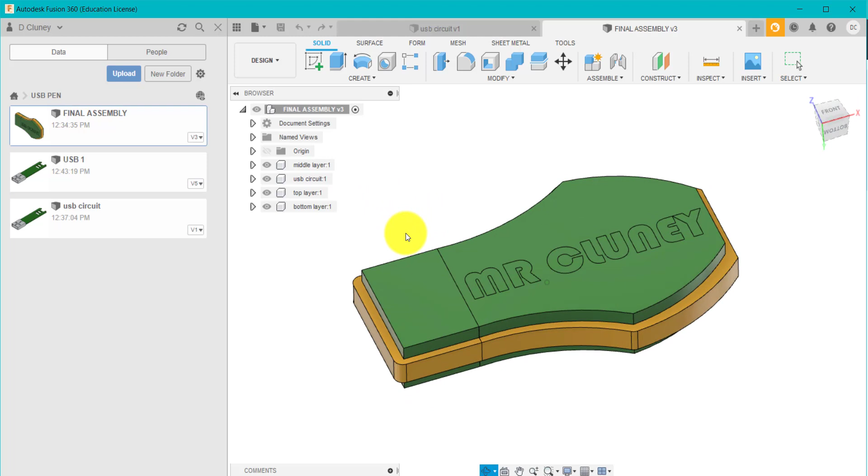So if we jump into Fusion, if I go back up to here and just show you one design that I come up with, you'll see what I've done. This design could easily be 3D printed in layers or even laser cut, say out of acrylic, and then I could put the circuit inside.

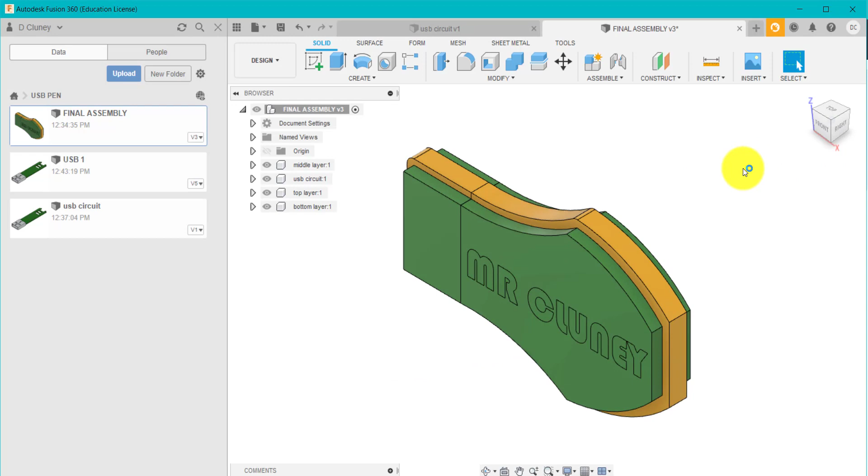So if I hide some of these, you see that the circuit's in there. I can put the circuit inside and glue these layers up, and I've got a very simple design. There's nothing wrong with that design, okay? It will work, it will function, but I'm just going to show you a different technique on this one.

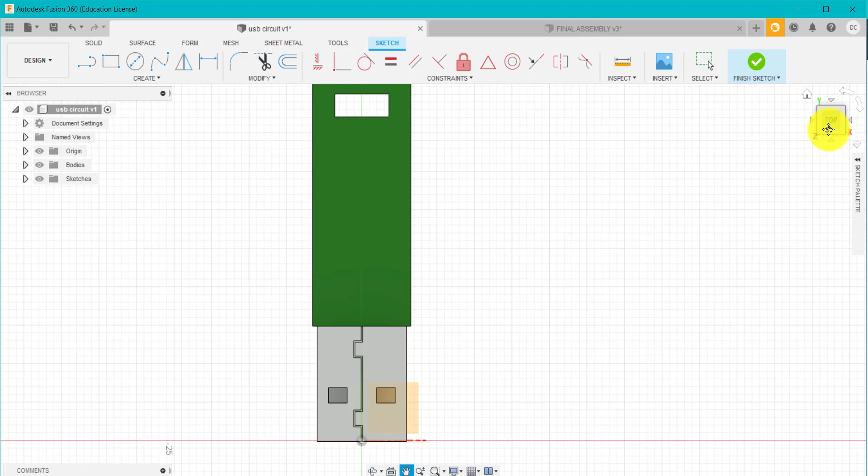Okay, so first of all, we're going to click on Sketch. I'm just going to hide that so we've got a bit more space. And I'm going to zoom in and I'm going to click on this bottom layer here, and I'm going to zoom out, use the pan tool just to pan it around. And I'm just going to turn it this way because it's easier to show you what's happening.

Right, the first thing is to create a design, a body around this. And then, once we've got that in 3D, I'm going to subtract this component away from the body, and it'll basically create a cavity for this USB to sit in. And then there's another few things that we might do in terms of splitting it to create a cap, or splitting the main body in half, so it's easy to assemble later, but I'll show you that shortly.

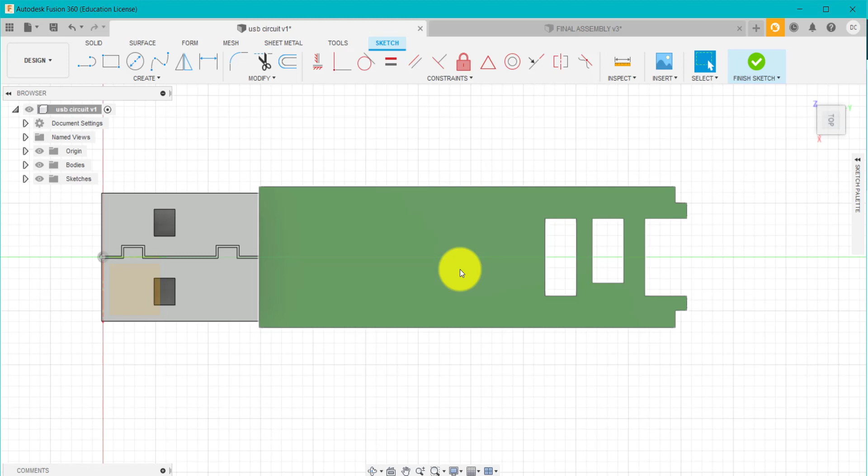So we can use any of these tools up here or a combination of those. I could use circles, I could do lines to create a design, ellipses, I could use a spline if I want a very curvy design. It is entirely up to you. But what I'm going to do is create quite a simple design to start with.

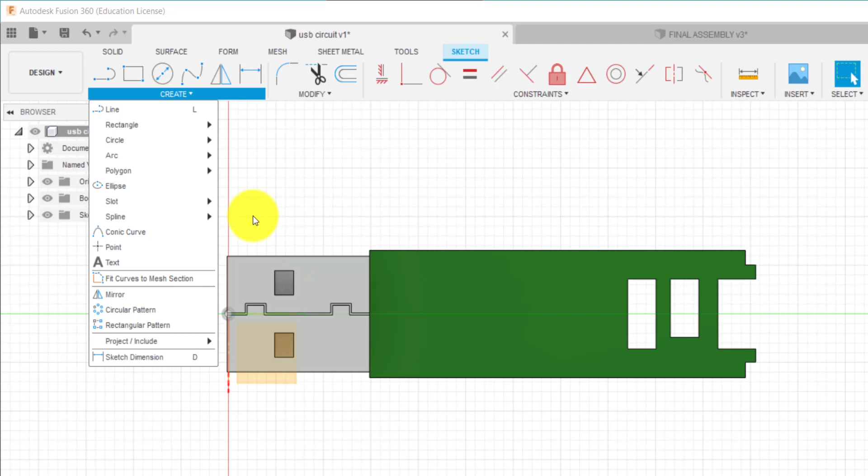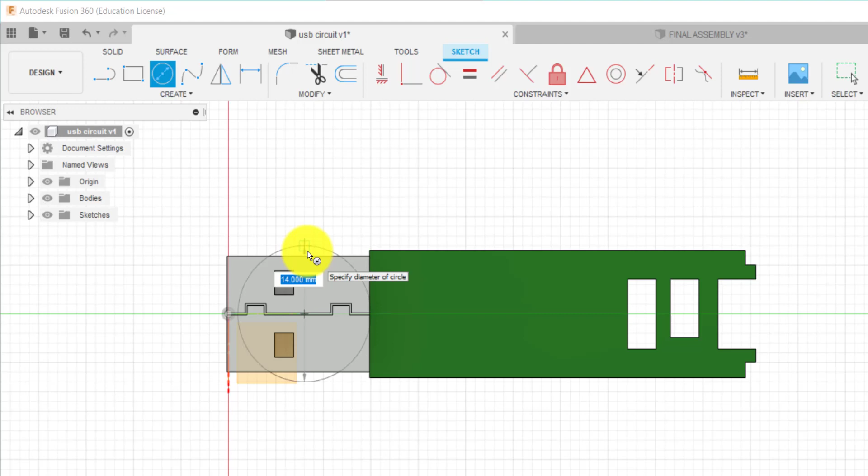I'm going to use a set of circles. I'm going to hover on this center line and drag this out. And I need to make my body obviously bigger than the actual circuit board. So if I'm drawing this here and that's like part of the cap, it's clearly not going to fit, it's going to be sticking out. So this needs to be a little bit bigger. So I'm going to go for, say, stick with 26, that's quite good.

And click enter. So if you remember before, you could always click dimension, dimension these, and edit any of these by clicking on it. So if I want to do 25, I could do that. And again, I could use some straight lines, curves, or whatever to create a design in here.

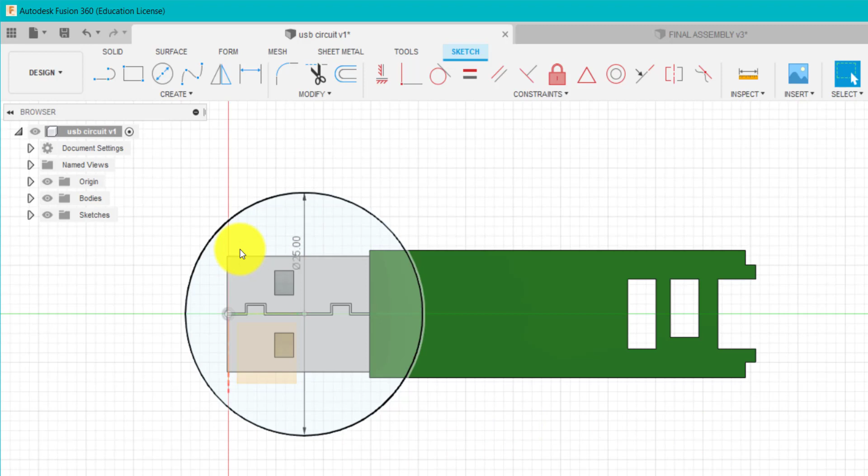Now what I'm going to do is something that you may have practiced before, is create a rectangular pattern. So I could draw a circle and another circle and dimension them, but just to make life a bit quicker and easier, I'm going to use this to stretch it out. I'm not going to stop there because I want my circuit board to be within my design.

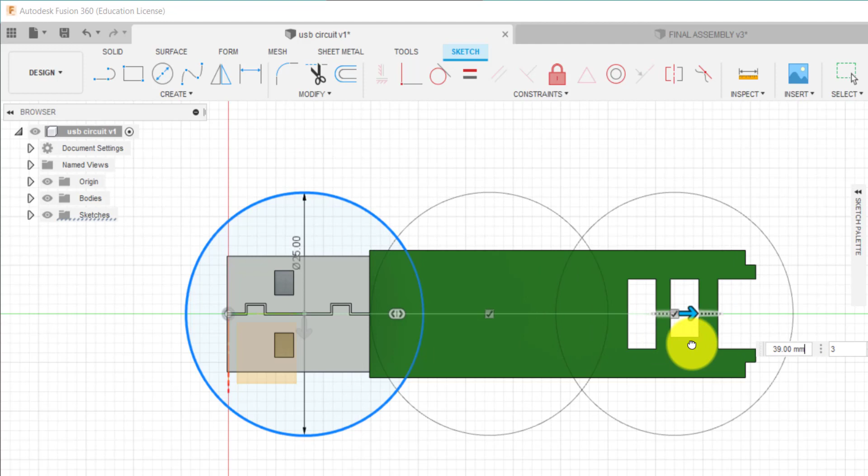So I'm going to go a little bit further, like so. And I want all these circles to be the same size. You might want smaller circles, it all depends on your design, but I want them the same. So I'm going to copy those across like that. I'm going to come to the home so I can see what's happening in 3D.

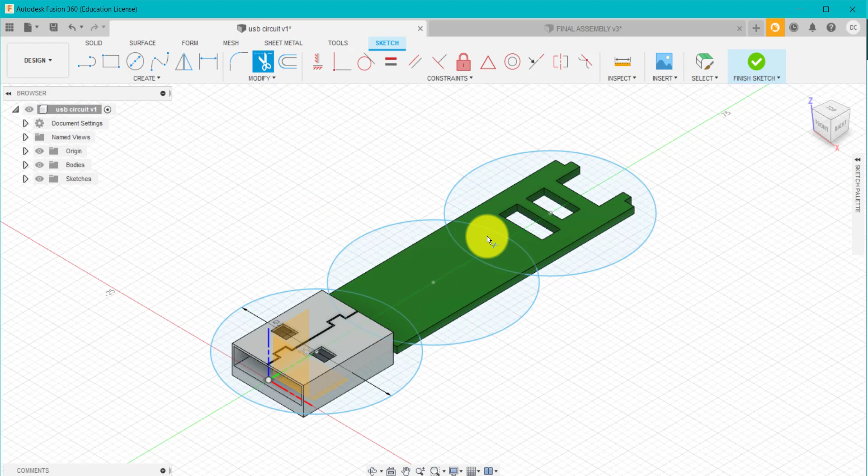And I'm going to extrude this. Now, depending on your shape, what you might want to do is tidy up your sketch by using the trim, and you could delete some of these intersecting lines. But I'm going to save a bit of time by just going to extrude.

And I'm going to just select all these like so, also left clicking to select those. I'm going to come to the front view so I can see what's happening. And Fusion wants to cut, so it's going in red, it's got cut. I don't want it to cut. I don't want to join, because if it joins, it's going to fuse into the circuit board of the PCB.

I don't want it to do that. I don't want it to cut, don't want to do an intersect. I could do a new body - that's one way of doing it.

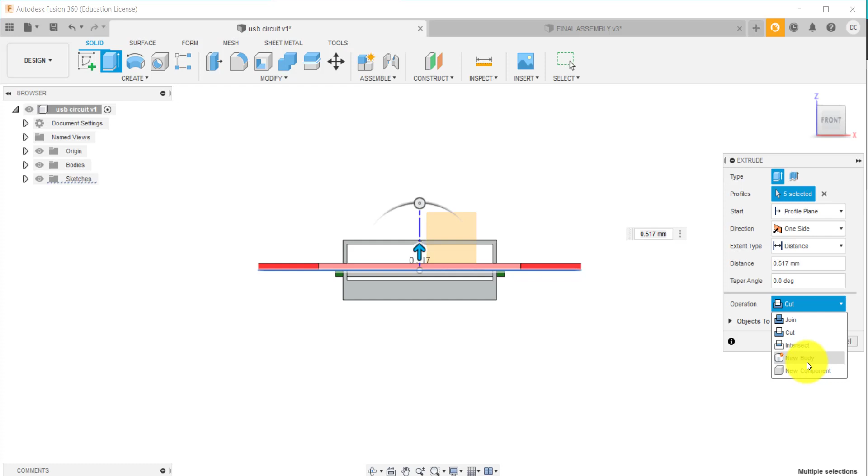But I'm going to create a new component, and a new component will make certain things easier later. I'm going to drag this up, and as you can see it's only going one direction, so I could do two-sided. If I want the top to be slightly thicker and thinner than the bottom, I could do that, like so. Or I could do symmetry.

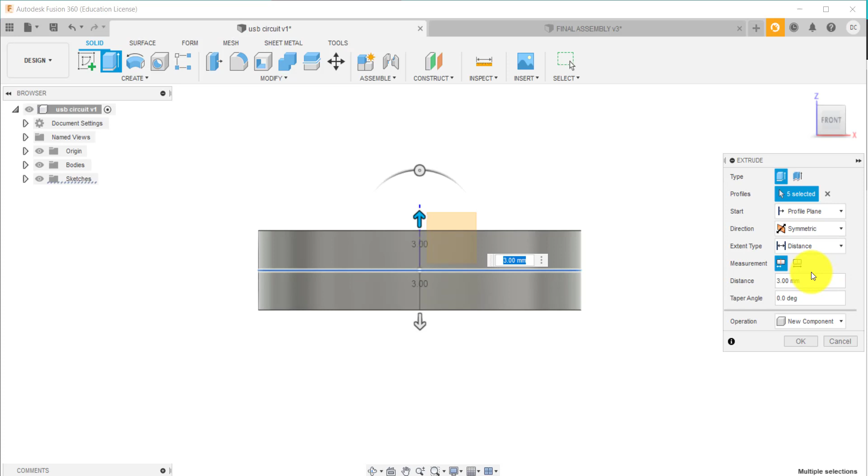Now that's doing half the length, so it's doing 3 millimeters either side. I could do the total length, which is 6mm at the moment. We're going to stretch that up to say 7mm, and you can see what that's done. Remember, new component will be easier for later.

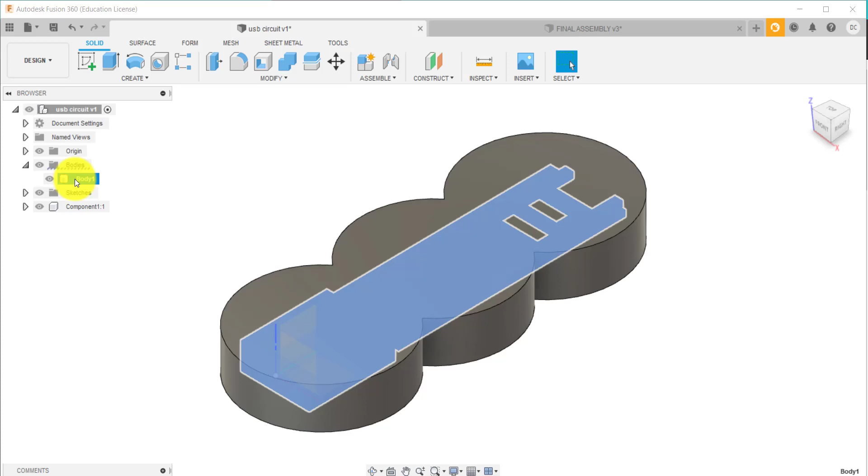So what I've got at the moment, if we go up to here, I've got this body and I've got this component here. Now I could later create a component of that if I want to do an exploded view and stuff like that, which I'll show you later, but for now I'm just going to keep it as a body. What I want to do is essentially subtract that body away from this component.

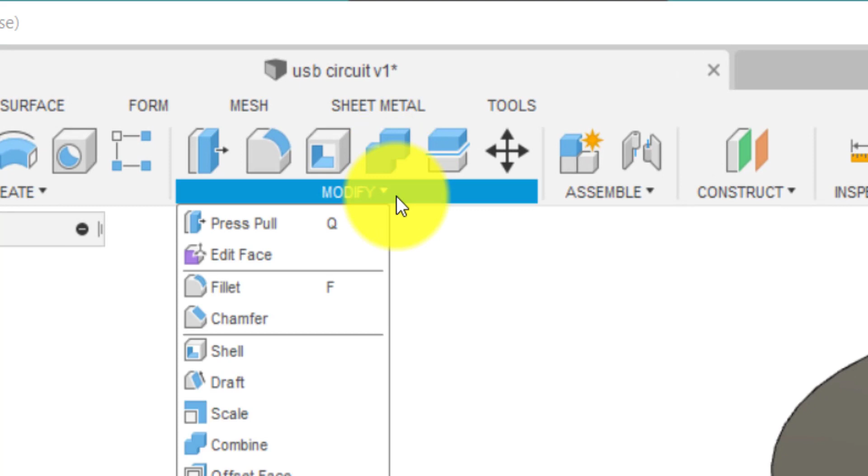And it's very easy to do. All we do is go to combine, or this is in modify, like so, and target body. Target body is this body here, what I've created. The tool is going to be this one here, and I want it to cut.

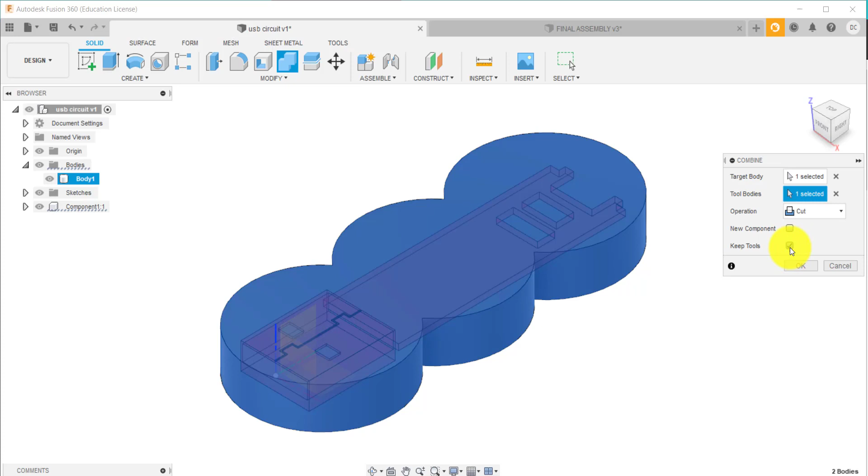There are again some different options - I don't want to join it or do an intersect. What I want to do is a cut, so it's going to subtract it, and I need to tick keep tools. If I don't click that, then my USB might disappear. So I want to keep it, and I'm going to click OK.

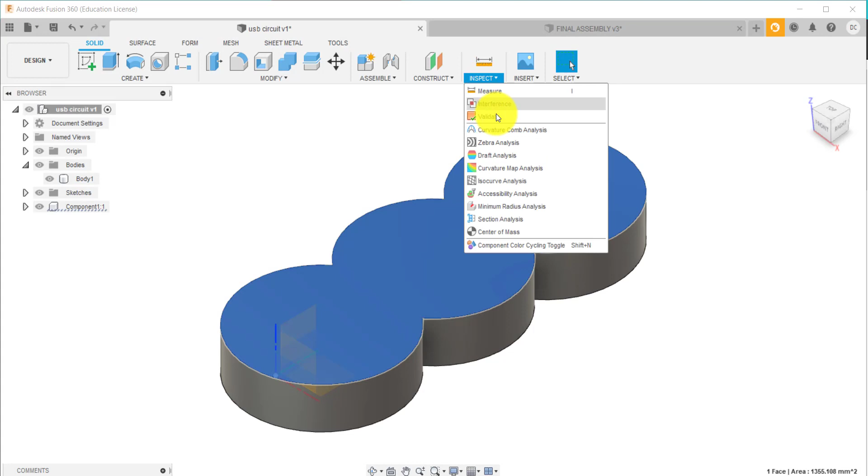Then you might be thinking, sir, that hasn't done anything. Okay, it has, because it's on the inside. So the way to look at that is a number of ways. What I'm going to do is select that top surface, go section, and I'm going to drag this down. And you can see what it's done - it's subtracted my circuit board away from my body. It might be easier if I do a cross section.

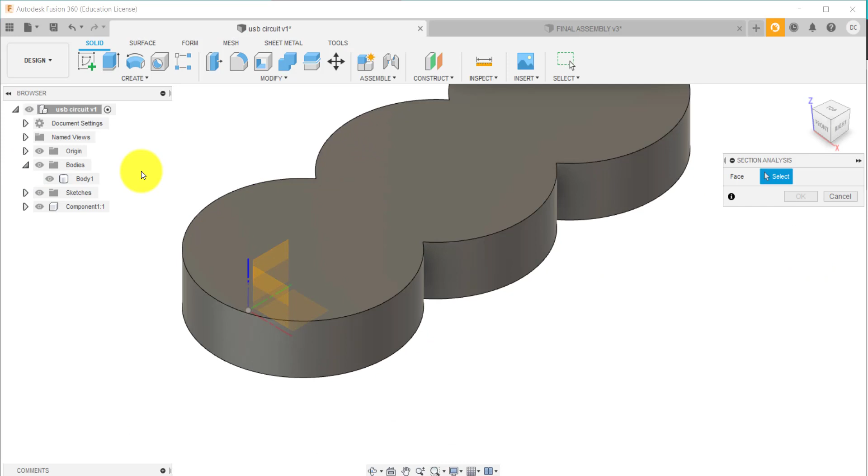Let me select one of these origins. I'm going to select that one. And what it's done, like I say, it has subtracted away from that part. It'll become a bit more clear later. So I'm just going to click cancel for now.

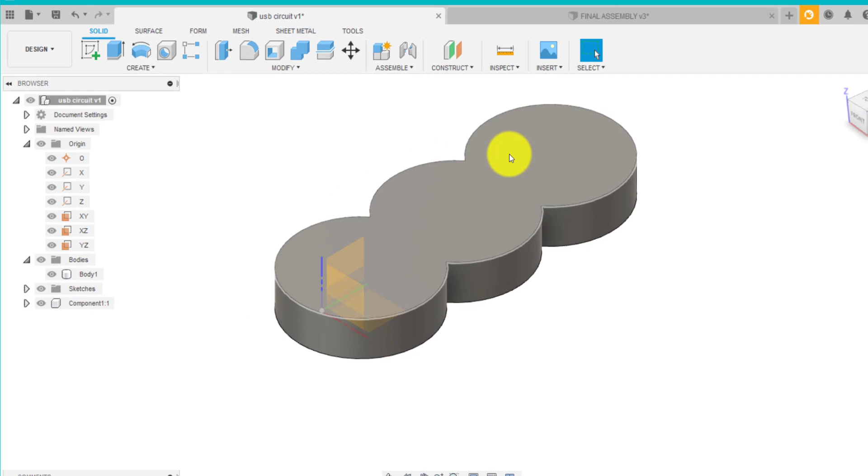Now, what we've got is my circuit board inside my body. And really I need to separate this here, create a cap away from the body. So what I'm going to do is activate this component - that's why it's good to use components. I'm going to activate it by clicking on here. That means it will only affect this particular component, it's not going to affect the circuit board.

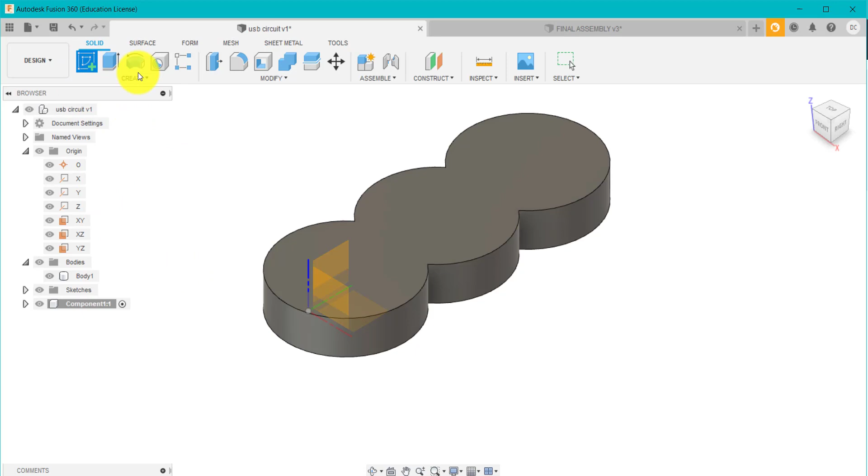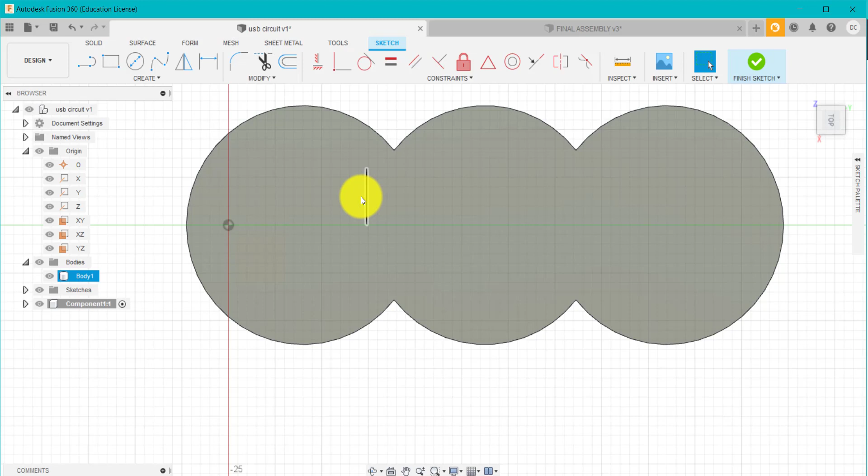Now with that active, I'm going to click sketch, and click this top surface. Again, I'm just going to spin it around, make life easier, and zoom in like this. Just click escape. Now what I want to do is draw a line where this head of the circle ends, so just about there like that.

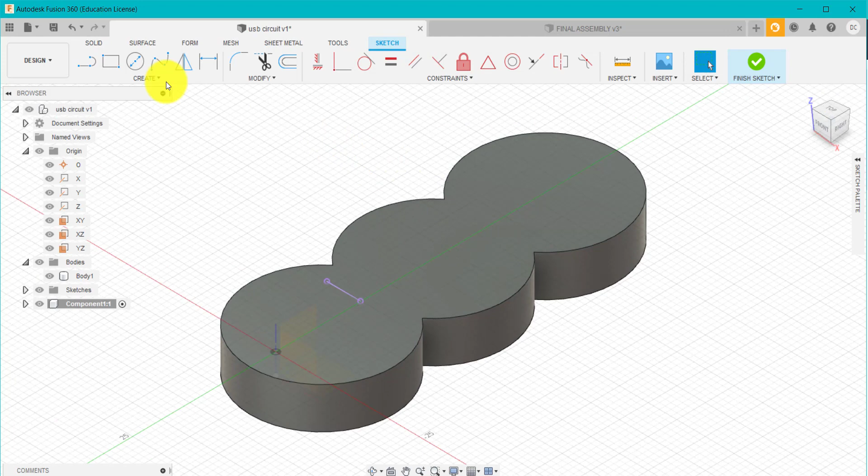Now I could try selecting it like that, and press P for project, and click OK. Let's see if that works. Yeah, it has - so it's selected that edge of the circuit board. And once I've done that, I could use a line and draw over it, but there's no need to do that. I go to the house, and go up to modify, and find the split body.

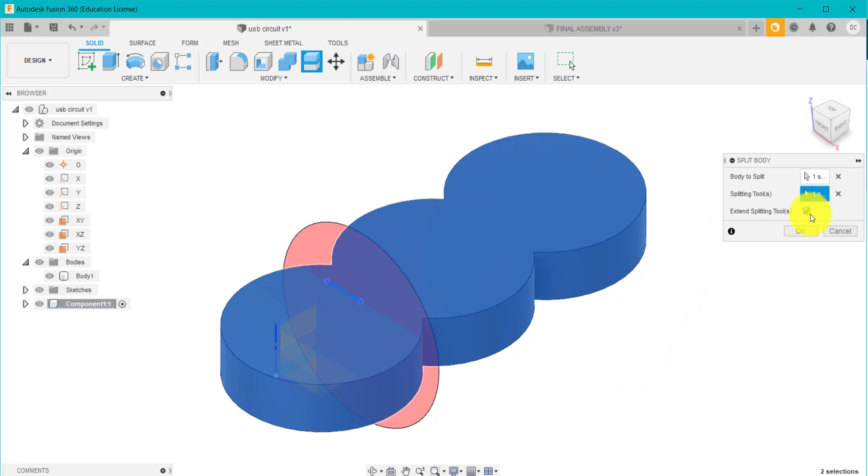This time body to split, it's this one. The tool I'm going to use is that straight edge there. Extend is fine in this occasion. If I had maybe a part of the body coming around here or something and I don't want it to split right across, but on this occasion it's fine to be ticked. I'm going to click OK.

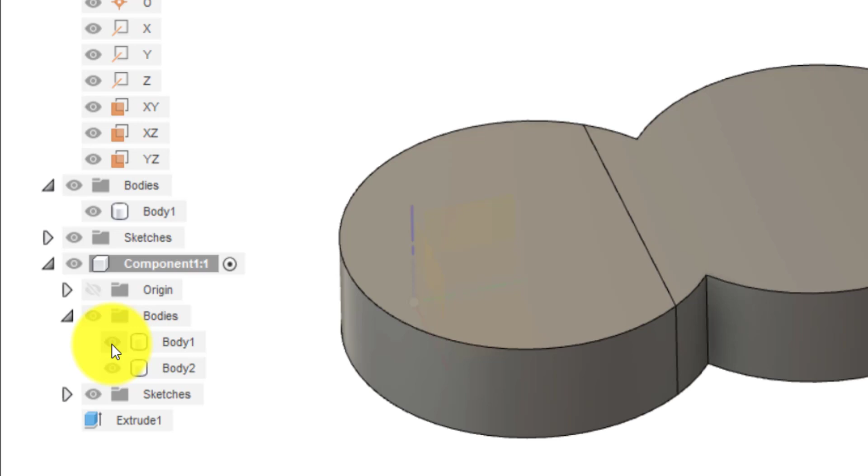And as you can see, what it's done there, it's split this. So if I now go into here, what I've got is this here. Okay, so I've got my cap and I've got my body like so.

If I hide the cap and we spin this around, the reason this is semi-transparent is because it's not active. It's there, but it's not active. So remember, I've picked this.

I could 3D print the cap, 3D print the body, and get my circuit board. I could put a bit of adhesive on it if I wanted to, and then push and slide it into here. And that will work.

However, that's probably not the best way of doing it, because when we're designing a product, we want to think about the environment and avoid using adhesives and glues. We also want to design a product so it's easy to disassemble, so it can be repaired at the end of its life and recycled. We want to be able to get inside it, so maybe have a number of components to do that.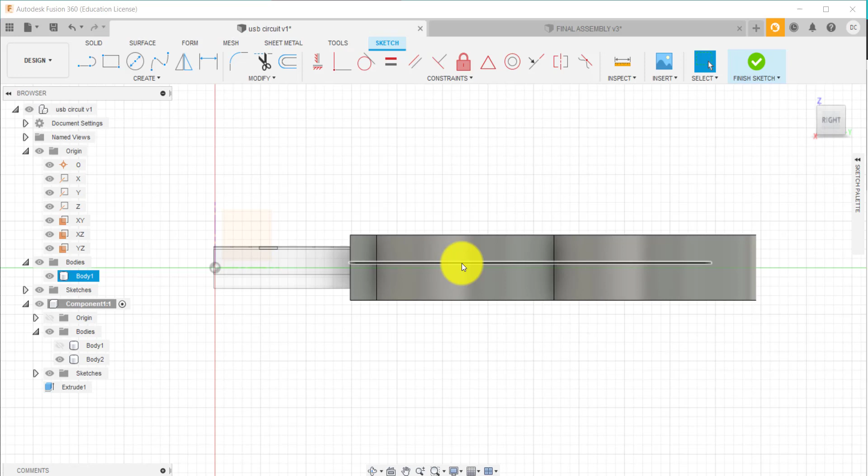All right, and we've got this. So now if I hover over it, it's going to come up with a number of lines. I'm actually going to use this top bit of the circuit like that. Then I'm going to press P again, or go to project, and project that edge and click OK.

So that's seeing the top of the circuit board, and now it's made a line as a reference. Go up to, not combine, we go up to split.

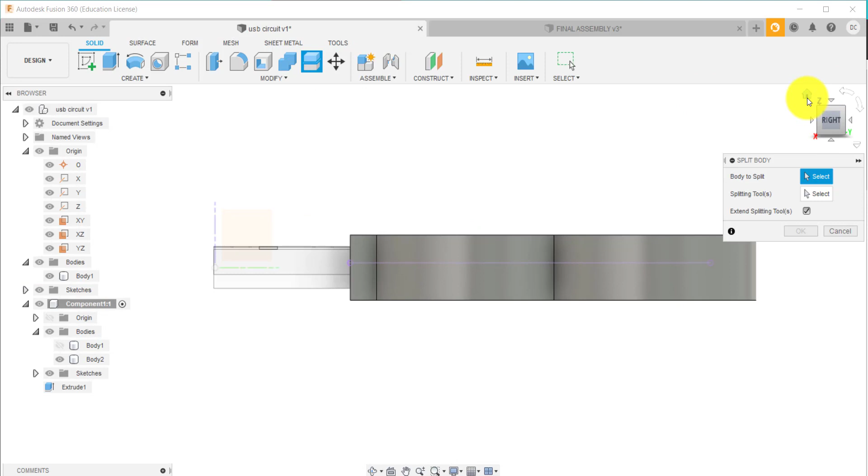And we're going to split which body this time? This one. What's the splitting tool? We're going to choose, if I just hide that, I'm going to choose a sketch. I'm going to split that.

So what you've got here now is your cap, your top part of the body, and your bottom part of the body. So now when I'm assembling this, I could push my circuit board in, and then place on the top.

So the top could be placed on and glued in, but again, it's probably not best for the environment in terms of just gluing it together. And also I want to be able to get inside it to repair it and disassemble it.

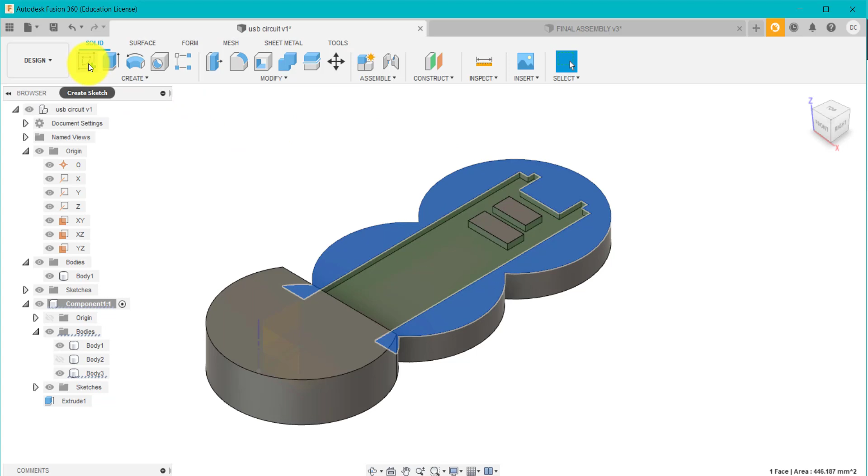So what we're going to do is I'm going to hide this one again, and click a sketch on this top surface, zoom out, and spin this around.

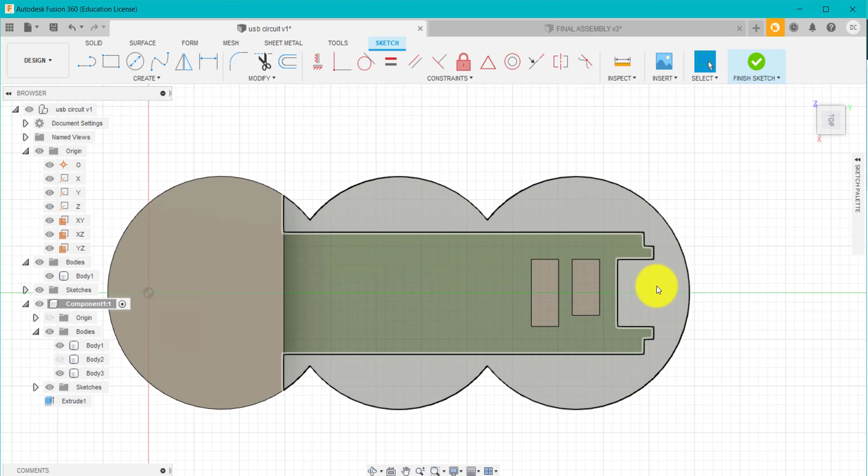What I'm going to do is create some little pins. Now this will depend on your design, how many pins or where they go. But I'm going to put a little pin, say up here, down there, maybe another two there, maybe one at the back. We'll have pins sticking up on one part, and then holes on the opposite side so it pushes together.

So this is an easy way to do it. There are more complex ways of doing it, and I could teach you how to do that, but this is the easiest way. So I'm going to go create some little pins. I'm going to make sure that these are not too small, so I probably wouldn't go any smaller than what I've just done on the screen.

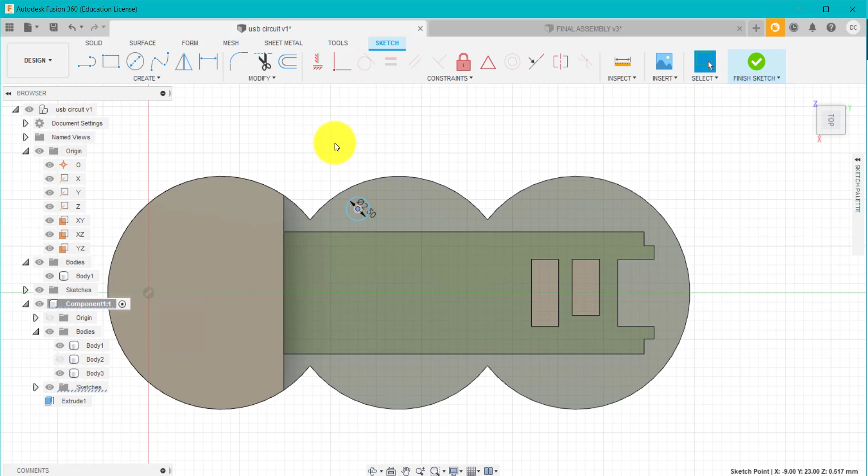And we're going to put, if I dimension this, okay, so that's 9mm. I could draw these in one at a time. If I go to rectangular pattern, this time I only want 2, and I only want 2. I've dimensioned that because I know that's 9mm in the center. In total, all the way down, it would be 18.

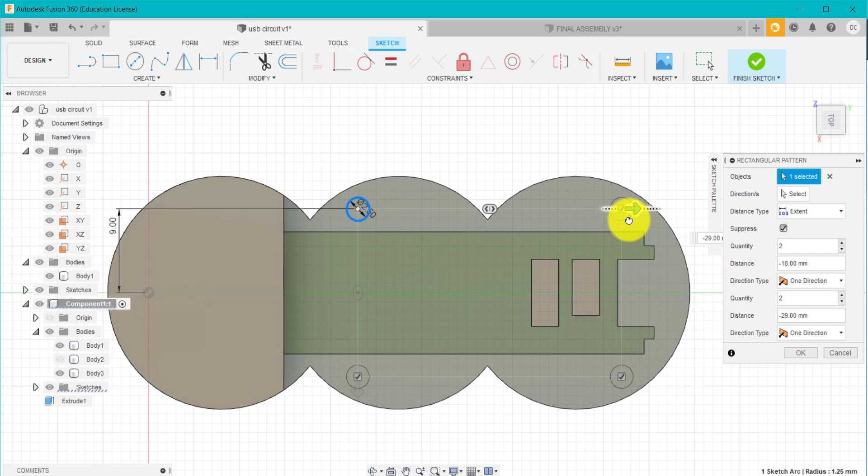And I've spaced that out roughly where I want it to go. I could maybe bring that back a little bit further. Any of this you can edit later. I'm going to click OK. And actually, I'm going to keep it as 4. I was going to put one in there, but I'll keep it as 4. And we're going to go up to here, go up to Extrude.

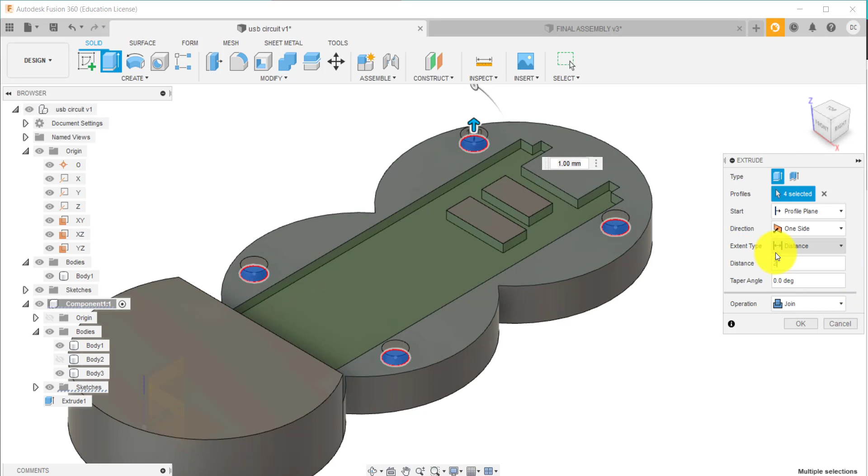I'm going to extrude this and go up, say 2mm or something like that. You don't want to go a bit crazy because this will then end up poking out of this design here, so you don't want that to happen. So we want, say, 2.5mm. Again, you could always change this, and I'm going to click OK.

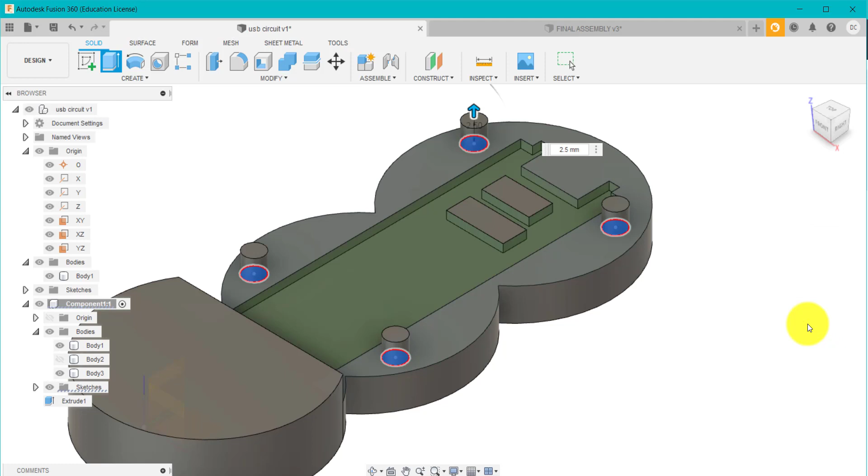Now what I'm going to do is use the same tools I did before, and subtract this bottom body away from the top, and it'll leave the holes in there. Oops, if I could turn that off.

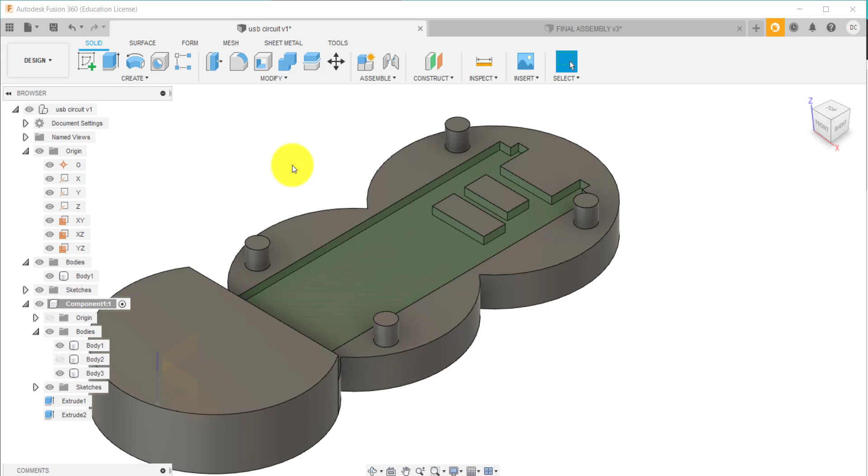Now, what I'm going to do before that is, just to make this easier to remove, I'm going to add a tiny little fillet on these edges. Let's try 1mm. That's a bit too big, so I'm going to add 0.5, or maybe 0.25, so just a little round. That'll just make it easy when you're pushing it on to get it on and off. There'll be a slight gap.

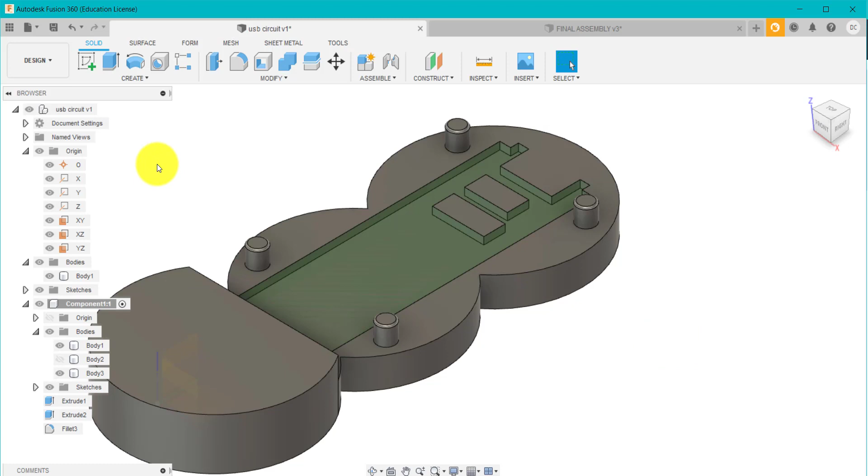So I'm going to turn this one on, and make sure I select the right tool this time. So I'm not doing a split, I'm going to use combine. The target body is this one, the tool is this one. I do want it to cut and I do want it to keep. I'm going to click OK.

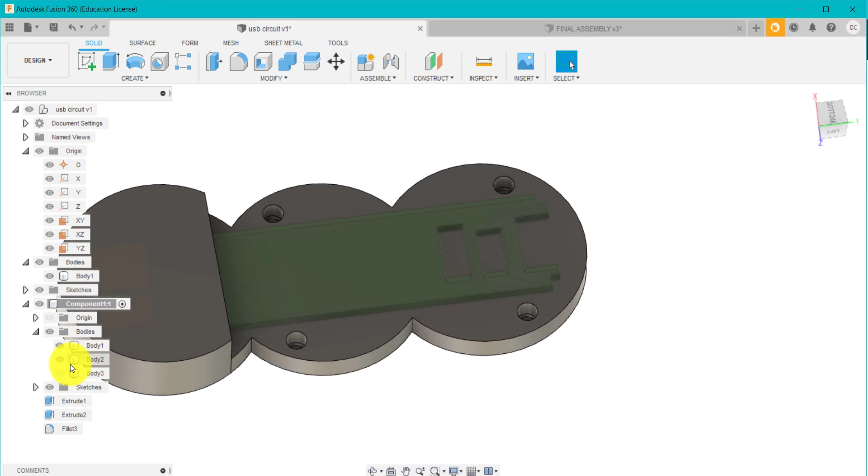So again, you might be thinking it hasn't done anything, but if I hide that one and spin that around, it's now subtracted those away from that. And I could use that as a simple sort of push fit. Again, there are more complex ways of doing that, but that's maybe a simple way of doing it.

So we've improved this design now, because we can actually take apart the body rather than just having a block with a hole in it where you push the circuit board in. This is a better way because you can actually snap those parts.

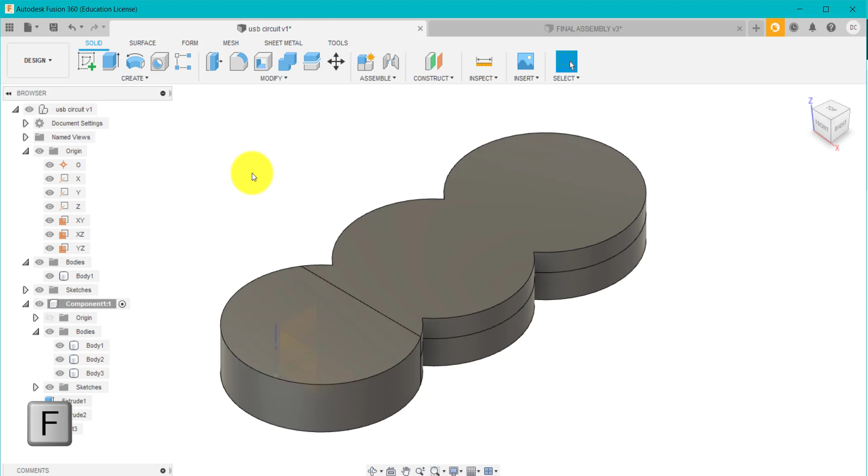Now, the other thing I'd probably want to do on this is round some of these edges. I could even add some extra detail on top. So I'm just going to go fillet, and select these edges, and type in a dimension. So 2, yeah, that's not bad.

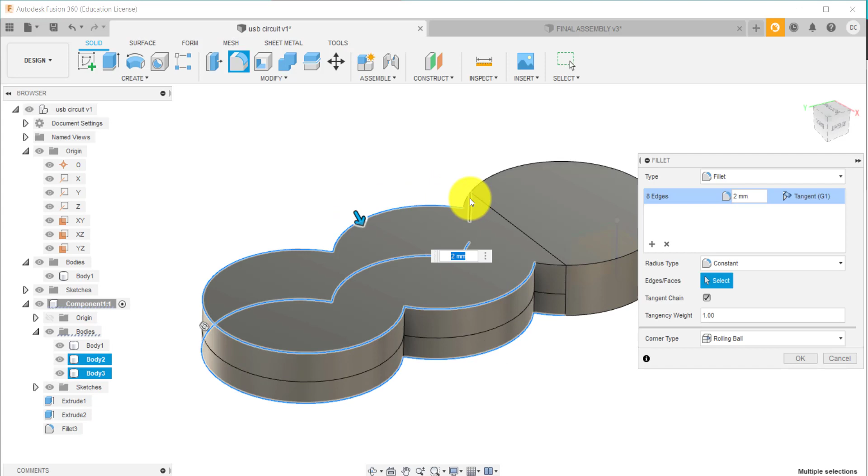And if I spin this around, and use Control, select these as well, and this little one here, and this one here, I've rounded that off.

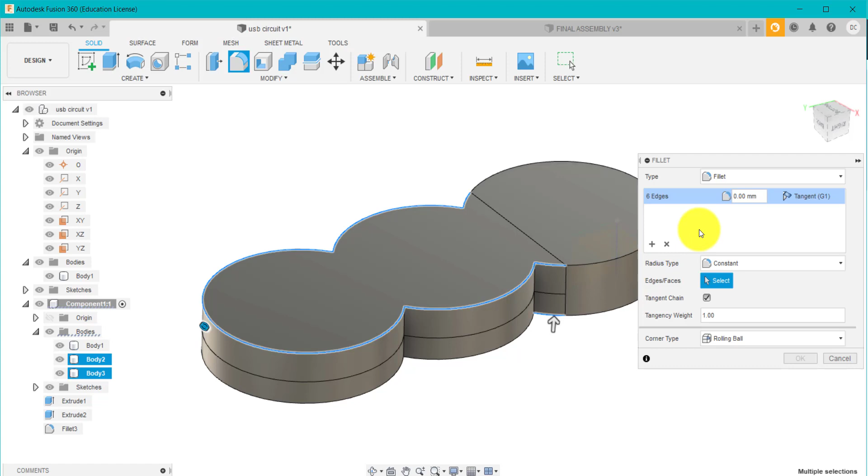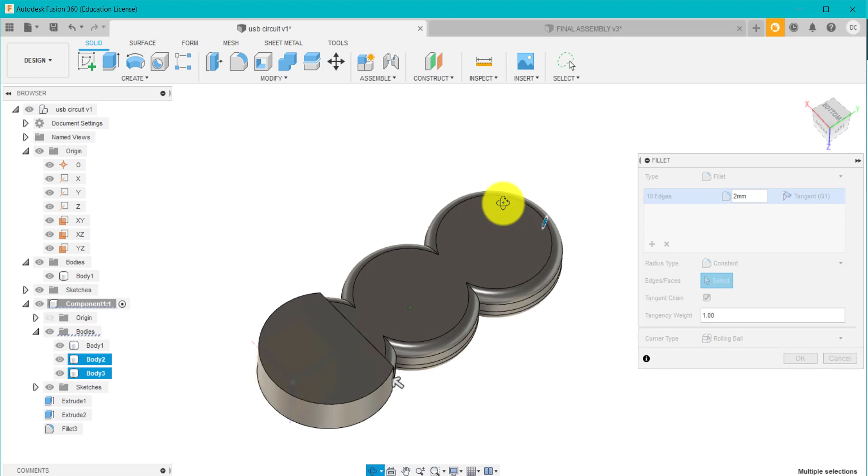What happens if I... not that one? Oh, go away. Now if I just do that again, come on here, come on now, that one. Oh, choosing the wrong ones, got to be careful when you're clicking. If you've typed in a dimension, it will give you a preview like that. Again, I'll control, just be careful you're clicking. Okay, don't get lazy like I am there. Got a bit, spin it around. Hold Control, like so. Now what you could do this in stages if you wanted to, if you've got lots of edges. I'm going to click OK.

And again, F for fillet, or fillet at the top, like that. So that's looking a bit better.

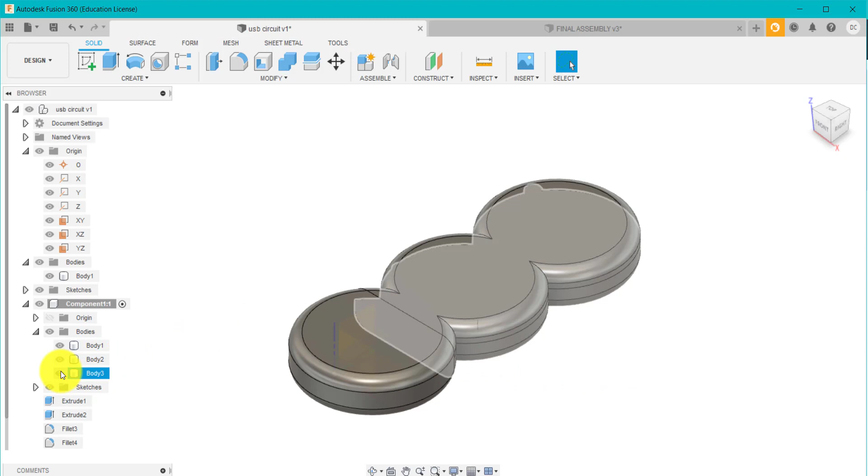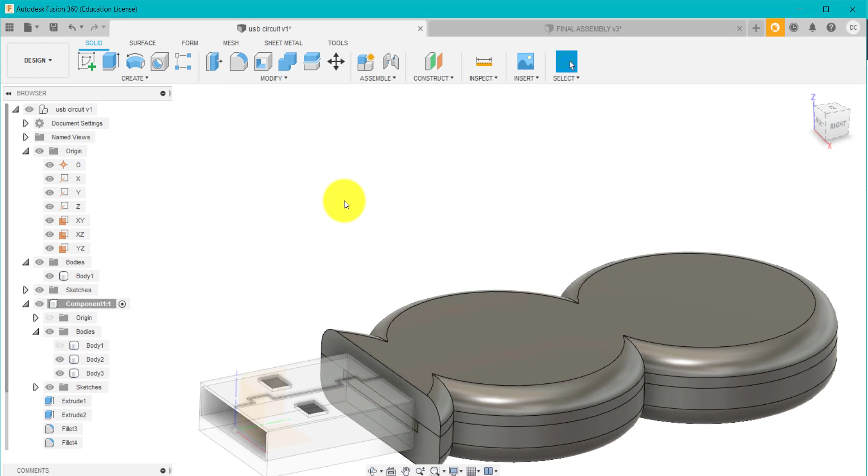All right, so again, a nice simple design. I could come in and go, let's hide both of those actually, spin this round, use fillet again on this edge here, but I'm going to go really small this time, just a slight fillet on there. Like that, maybe hide that this time. So this is all details just to make your design, one, a bit more ergonomic, and two, it looks better.

And again, I'm going to select this one, so let's get that there. F for fillet, like that. Okay, and turn that one on.

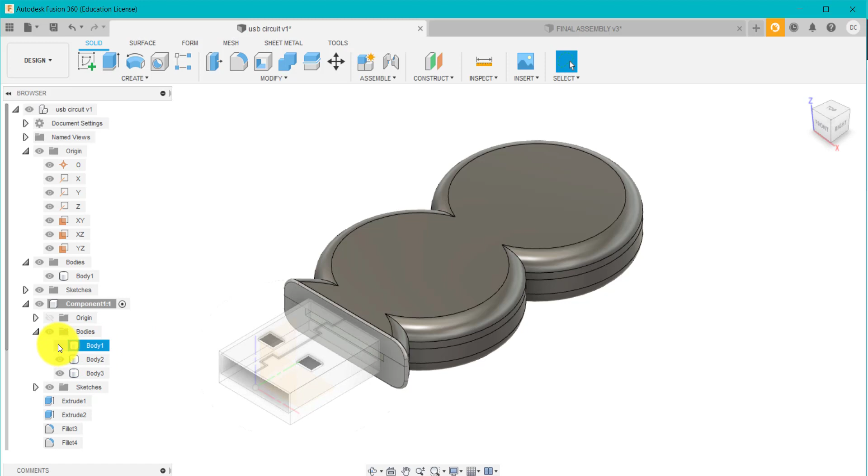Now this is activated. If I go to the top and activate everything, if I just turn my origins off, I'll just close this, just tidy this up a little bit. I've now got a design. Okay, so I've got a cap or lid here, I've got the body, which is split into 2 parts, and I've got my USB on the inside.

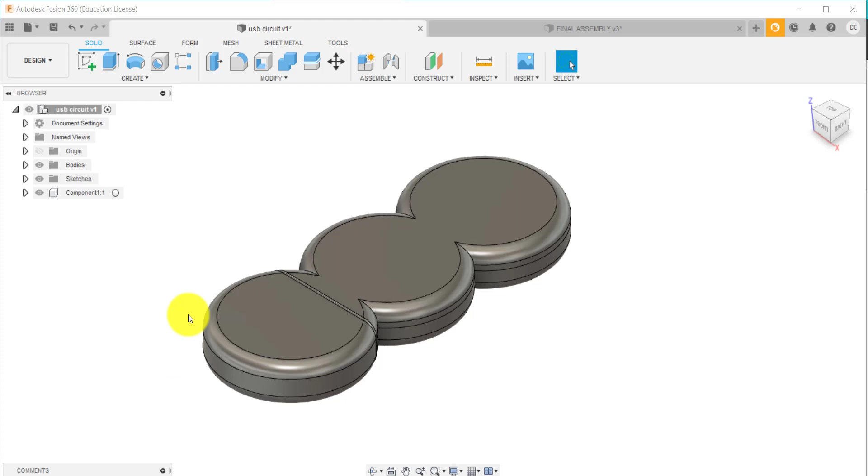And again, you can add extra things. So you could add text on the top and extrude it. You could add a pattern and extrude, either cut or extrude it so it sticks out, and add sort of a texture to your design. There's lots and lots of things that you could do, so have a go.